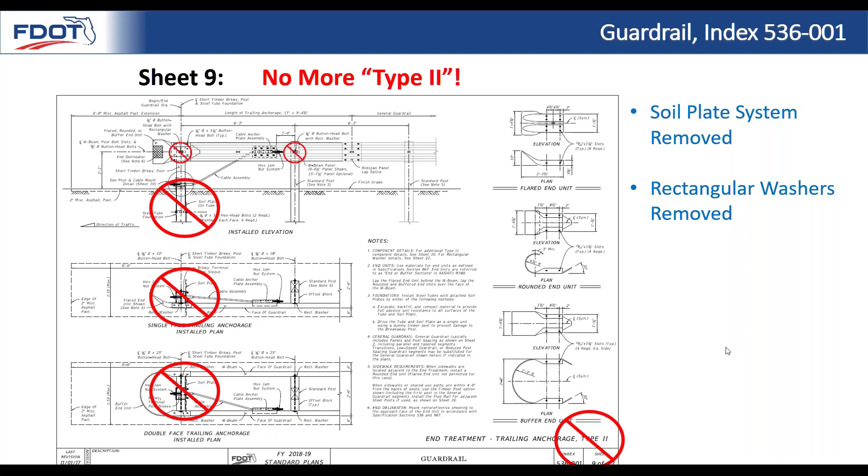Some rectangular washers have been removed. As far as additional things added, this is the new trailing anchorage - we have a new strut system, two struts total, one on each side, that takes the place of that soil plate.

We also have post 2, the new short timber breakaway post, and a steel tube foundation to help secure that a little better for MASH. These changes basically follow the latest design for MASH following discussions we had with Midwest Roadside Safety Facility.

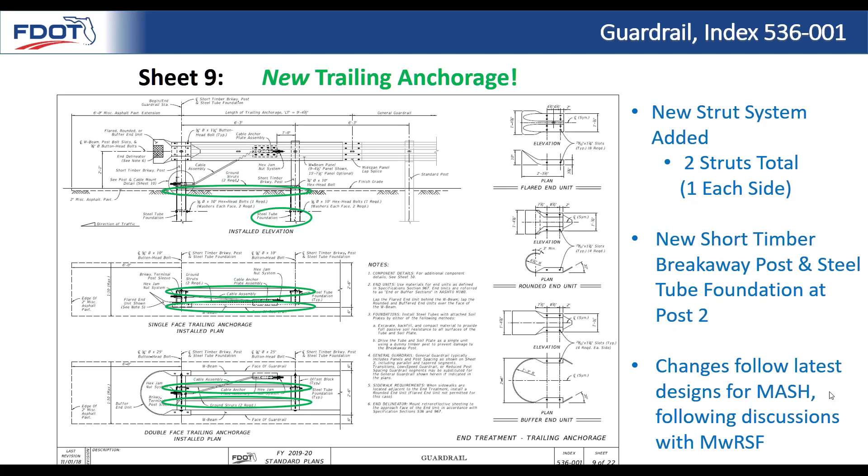So on sheet 10, to support that, we added the detail for the ground struts. We deepened the steel tube post foundations, again, based on our discussion with the research facility.

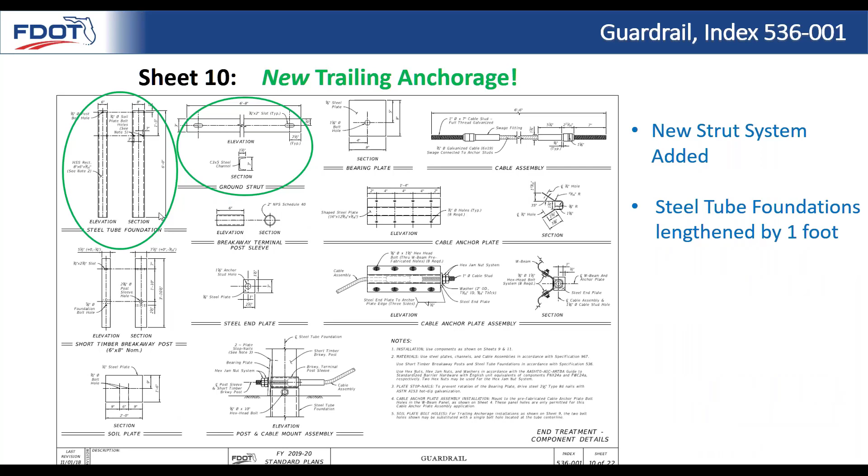To tip off the contractors that there is a change - because they've been building these things so long, they might not even look at the drawings anymore - we went ahead and changed the pay items to let them know something's different. So now all the type 2 items have been removed, as you can see, 25 and 28.

And then if you look at the BOE, we've added in the pay items basically 20 and 29. So there is a change there, and in the BOE it lets you know when it's effective. So that's helpful - pay item change on trailing anchorages.

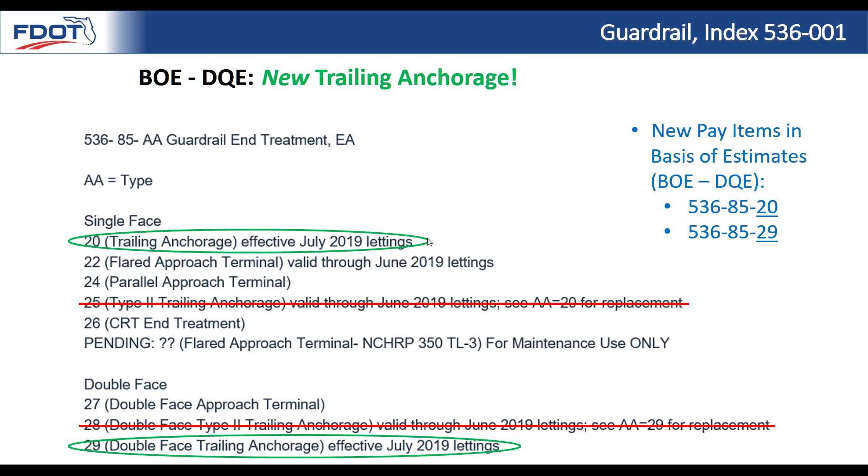One other concept from talking with the research facility, and looking at their reports, is that we have a new policy for basically placing the trailing anchorage. It used to extend basically one post spacing downstream of the hazard. Now it goes four post spacings.

They actually had done a lot of crash testing research and modeling on it, and it turns out that in order to develop this ribbon strength, you need to extend downstream of the hazard so that your vehicle gets captured upon impact going right to left here. I don't know if you guys can see the bottom of the screen - I heard that was an issue.

But basically, in order to ensure you capture the vehicle so it doesn't just penetrate through and go to the hazard, you need to extend that downstream.

This shows up in Part C of our new standard plans instructions. We explained the new policy there. And then also, if you use the new length of need Excel sheet,

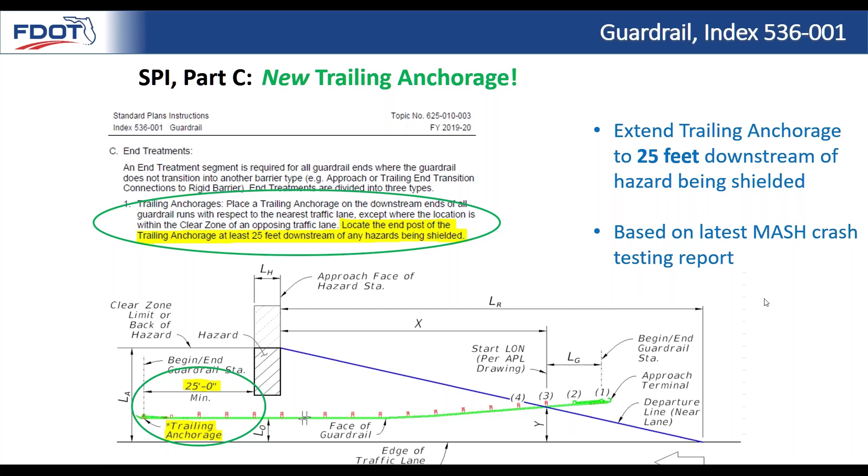it's going to show you that extension in the drawing automatically, so you know it's there. And if you actually use its stationing capabilities and input your hazard in the right location, it'll automatically extend that downstream for you. So it's handled in multiple places to let you know.

And that's all we have for guardrail. So now we'll move on to concrete barrier.

We've got a new barrier mounted sign support option that's got dual supports. We have space constraints, we have a new call out for variable section width, the pay item for that, and we'll show you how that works. Then we have a new wall shielding barrier and some taper rates for concrete barrier.

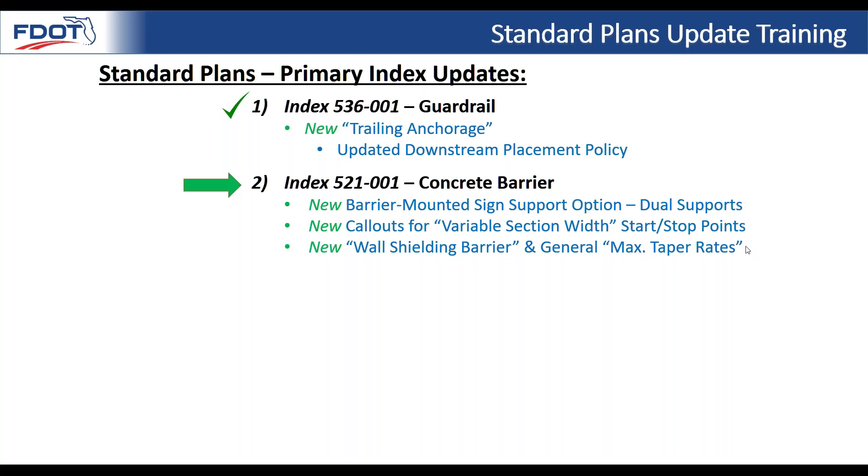So showing you sheet 8 now, this is a new sheet. We had a similar concept to this in years past, and we never really dropped the concept, but it wasn't drawn this way in the standard, and we had questions about it, so we went ahead and redrew it and added another sheet to show you what happens when you basically add dual supports on top of the barrier and don't increase the width of the barrier at the gutter line.

So the barrier basically stays 2 feet wide the whole way. You have no type of shoulder reduction. This would be used where you have limited space, and if the designer wants to handle it this way, this would be a project-specific design. So we went ahead and added that option in.

And I think in the future, the structures office may actually provide some support with helping to design the project-specific designs for these dual uprights. So you can stay tuned for that.

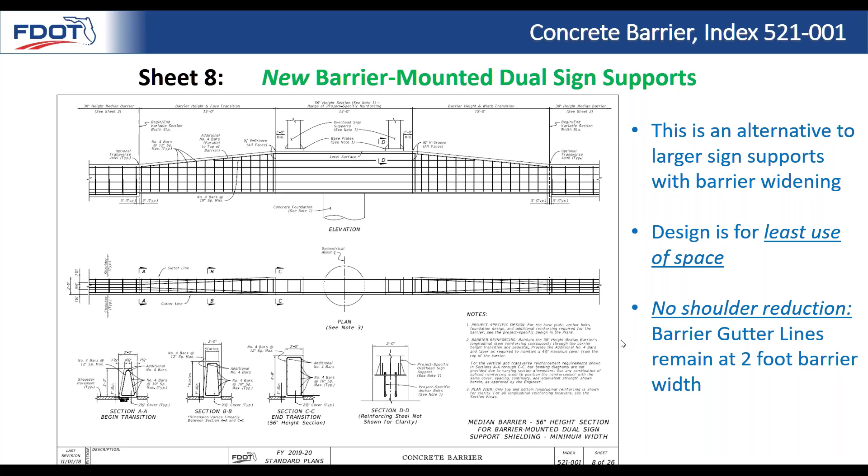So moving on, there's this concept called variable section width that we didn't have in prior years. We're now attempting to capture our costs more accurately. When you have a simple barrier section, like a 38-inch height symmetrical median barrier, that's very consistent, so you can capture linear foot costs very accurately for that. Short grade separated, tall grade separated, they're all pretty consistent.

But the thing that was throwing off costs and future estimates was that we have these more complex segments, we call them variable section width segments, that are all very project specific. So in order to not disturb these nice estimates, we went ahead and came up with a new pay item called variable section width. The BOE explains what they apply to. I'll show you some drawings on those because it's easier to see.

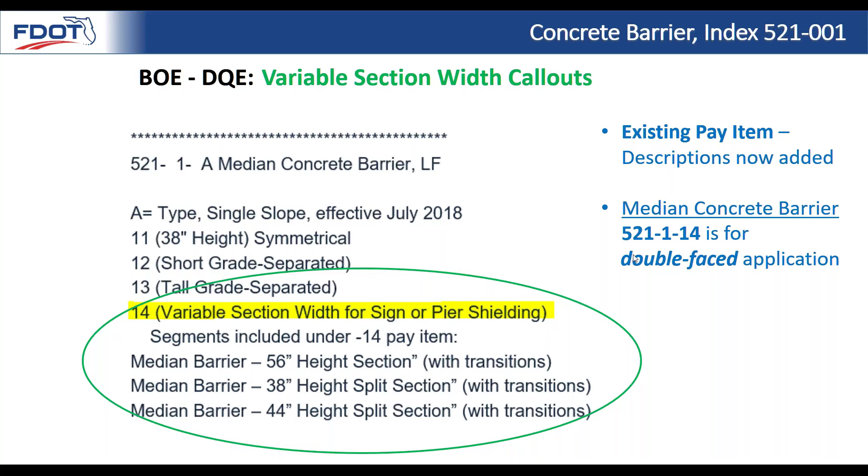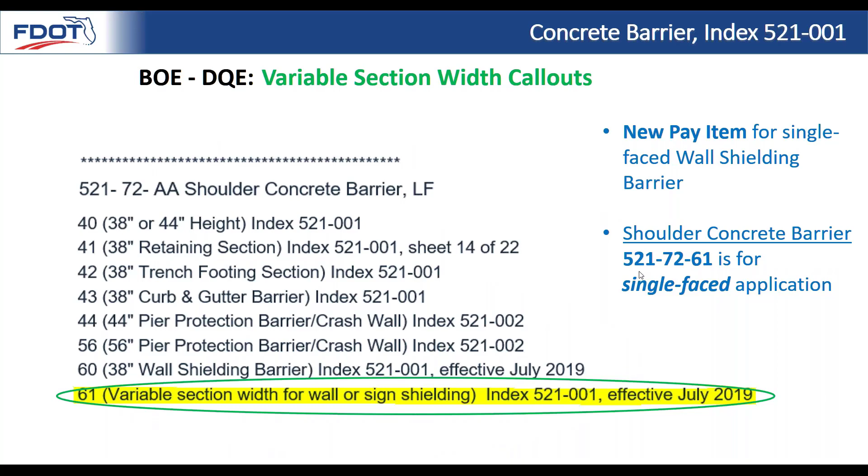For double face, you would use the median barrier version, and for single face, you use the shoulder concrete barrier version. So it's a variable section width, and again, the BOE tells you what it's used for. To make it more evident to designers where the limits of that pay item are, we went ahead and put in the standard plans drawings what the limits would be. I'll show you some examples of that.

Here would be our sign support, the larger sign support that's mounted atop the barrier. You can see the barrier gets much thicker, much taller. It wouldn't have the consistent linear foot cost of the 38-inch median barrier over here, so for that we use a different pay item. We put this in the standard plan drawing so you can see the begin variable section width station and the end of it.

Similarly, this is the new dual upright. The same concept applies because this section is much different than the standard section. This one isn't quite as easy to grasp because the gutter line stays the same 2 feet wide. However, we still call it variable section width because the top of the barrier does get wider and taller. It's basically non-standard, and in case there's any confusion, we called out in the drawings where the variable section width stationing is.

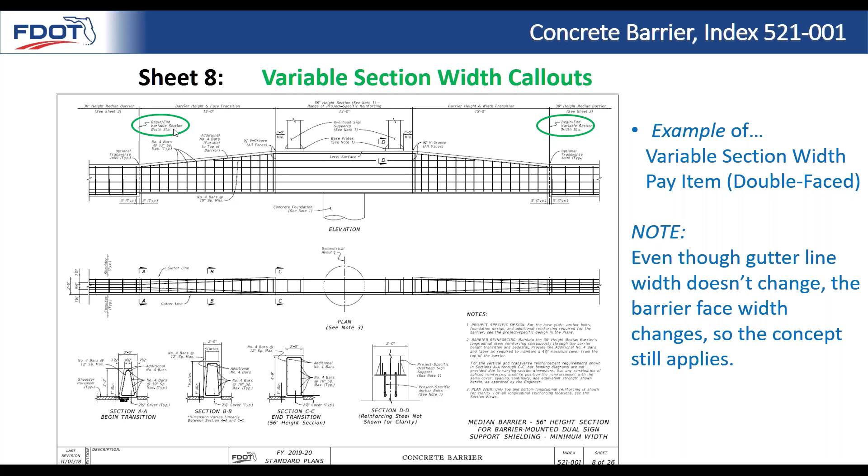Another example is the split barriers that go around the sign support pedestal. All of this together is just considered one linear foot pay item cost. I use this as an example to explain for simplicity, the linear foot measurement of this would just go along the center line. Even if there's dual sections, it's just one pay item and it runs along the center line. This is usually symmetrical and pretty linear, so it should be easy to handle that way. And again, we called out the start and stop points.

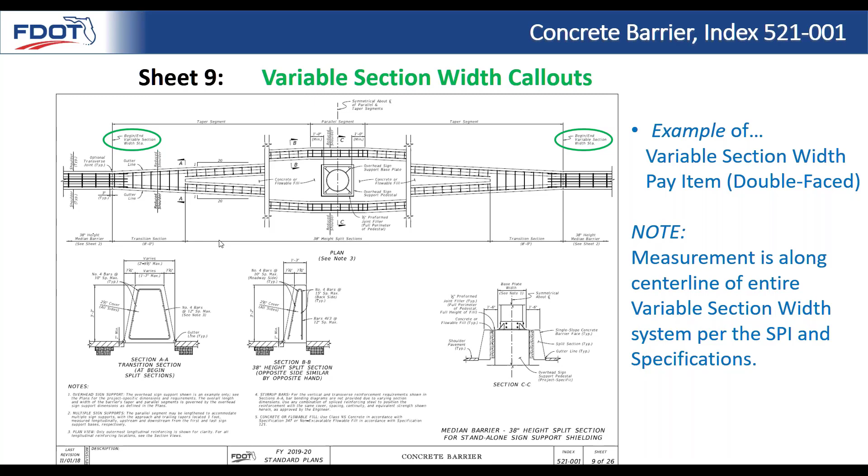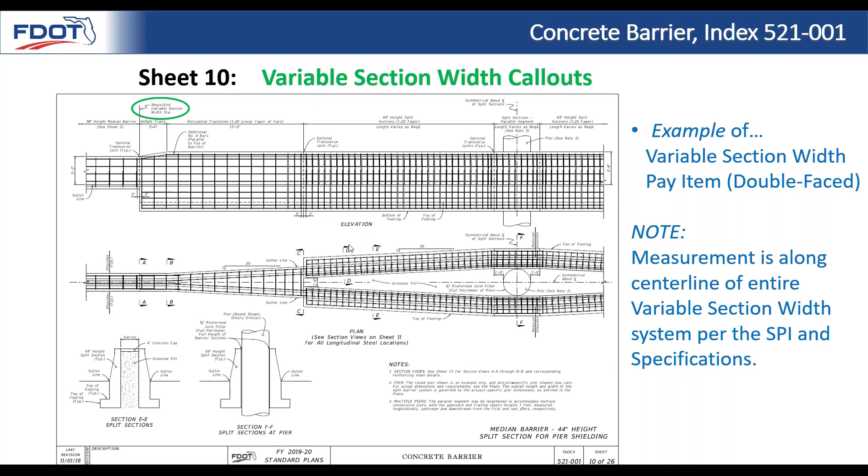One other example is for shielding a pier. Again, you can see this is all variable, not a standard shape. This is all highly project specific depending on the width of your pier. You can see where we would call out the different type of pay item here for variable section width.

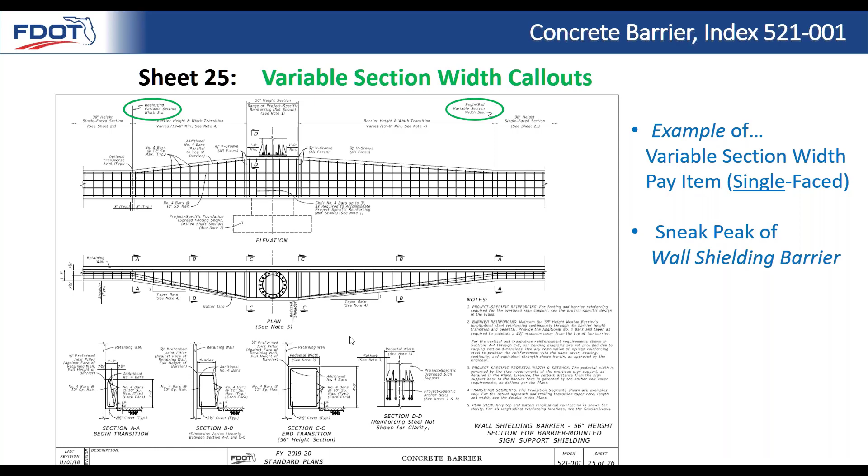And then last but not least, this is a new wall shielding barrier, so it's a little sneak preview. There you can see the retaining wall. This would be a standard section, but then you have the variable section width called out where this is all very project specific in order to handle that overhead sign support. This is an example of a single face version, the shoulder barrier pay item version of that. So now moving on, we've got the wall shielding barrier.

This is some new drawings and kind of a new concept that we've now standardized, but it's not really a new concept for the state of Florida. We're showing here past examples, and I want to point out these are non-standard because in the past we didn't have drawings showing this configuration of a flush mount, kind of a half section barrier. We didn't explain how to handle the joint behind it or anything like that, but designers were still electing this as project-specific designs. They were electing to do this, and it does make sense in certain locations. Why you might want to consider it is for just basic overall crashworthiness of the system.

Some of the MSE walls are vertical faces in general, but they may be less than ideal if their smoothness is not the best. The one at the bottom of the screen looks like it has a pretty roughened surface with a lot of ridges. You'd expect this would snag on a vehicle more so than some of the smoother walls, and certainly the barrier itself.

So to add some crashworthiness, it is beneficial. And another effect is to provide a little bit of protection for the MSE wall itself. The MSE walls tend to be a lot more costly than a simple barrier, so it's almost like putting in a sacrificial layer of concrete between the vehicles and the wall. That may help prevent some maintenance costs. If the MSE wall takes a hard hit, it may require a panel replacement, which could get costly and more complex rather than just replacing a simple barrier. So there's some added benefit of helping to shield the MSE wall, whether it really needs it structurally or not.

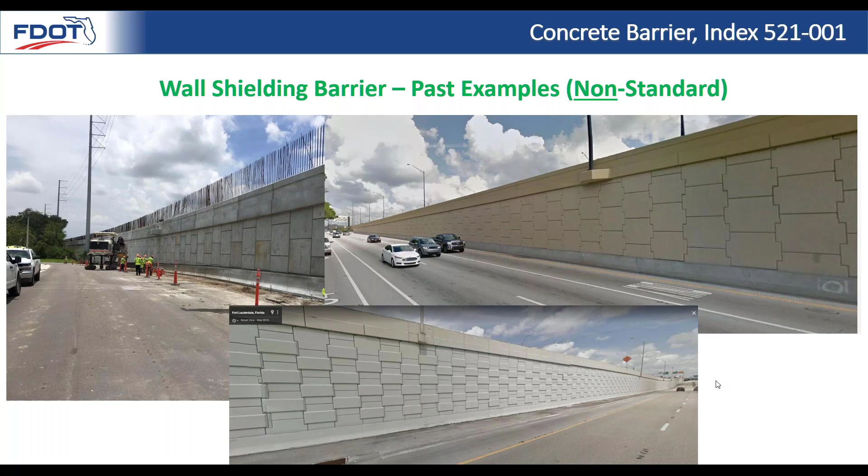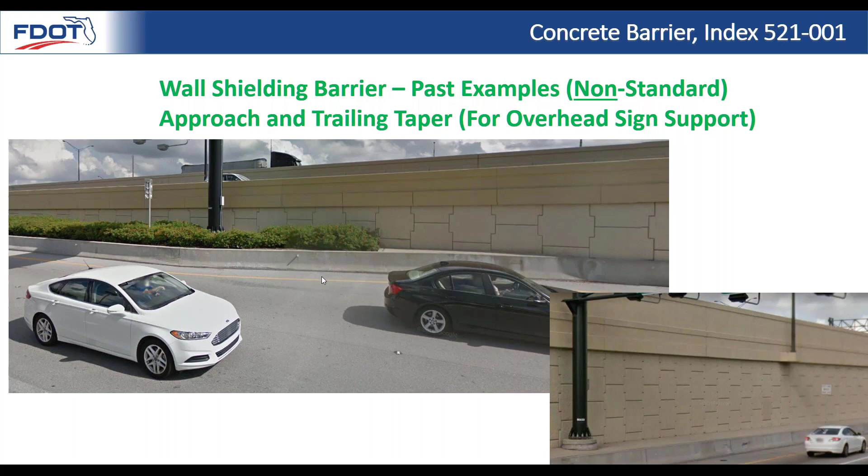Now again, looking at past examples, which we now provide some drawings for in terms of how to handle it, we have the tapering of the barrier, which tapers away from that MSE wall at different rates. In this case, it's for an overhead sign support to go around it. On the approach end, this is a gradual taper rate - Roadside Design Guide provides guidance on this, and now we will too moving forward. On the trailing end, in order to save space, this is a steeper taper rate, which makes sense because you're not quite as concerned with vehicles getting snagged on the trailing side. I'll show you some of those tapers coming up as well.

Here are the drawings again to support that - you can see we have the detail. Basically this overhead sign support would be a project-specific design depending on the size you need. We provide drawings showing the minimum dimensions all around it in relation to the barrier, in relation to the retaining wall, and then how to handle the backfill and all those other things. So we have drawings set up for that.

As I was talking about before, these are project-specific tapers, which I'll show you on upcoming slides, where on the approach side, with traffic moving right to left, it's more shallow, and then on the trailing side it's steeper. That also saves you significant cost with backfill of concrete or flowable fill by making these as steep as possible.

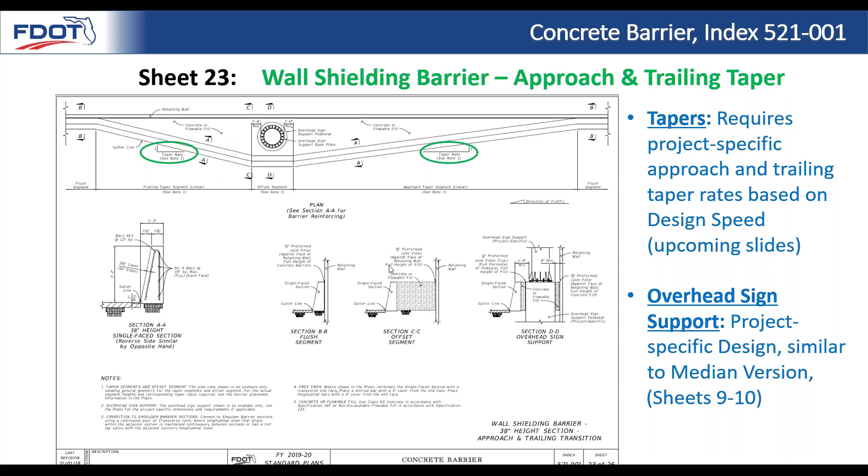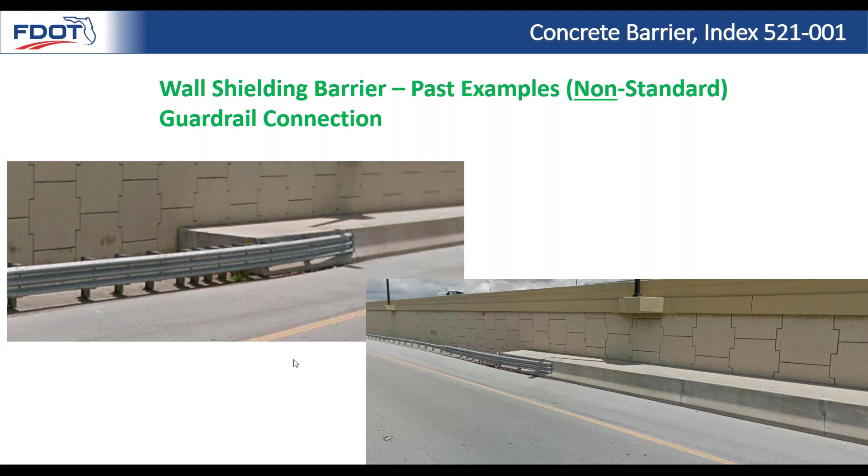So another item configuration we've seen out there is connecting the guardrail. You may be using guardrail as an effective approach treatment where you put an approach terminal here, or it could just be a convenient way to continue on with the barrier on the downstream end. So we went ahead and gave some details for that. You can see here we're connecting to guardrail, and this particular scheme requires a minimum of 5 foot, 3.5 inches, basically to attach the guardrail and allow enough setback distance for deflection and all of that. So we went ahead and detailed that out.

We explained how to terminate the backfill wall with some extra reinforcing for contractors and things like that. Again, this overhead sign support for connecting the guardrail may or may not even be here, but we're showing you an example of how it would fall into things with the dimensioning around it, should you have to use a project-specific sign support behind it.

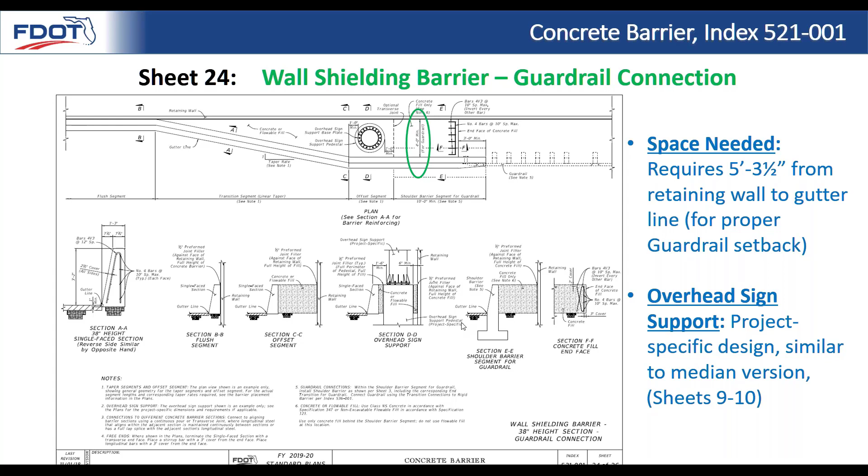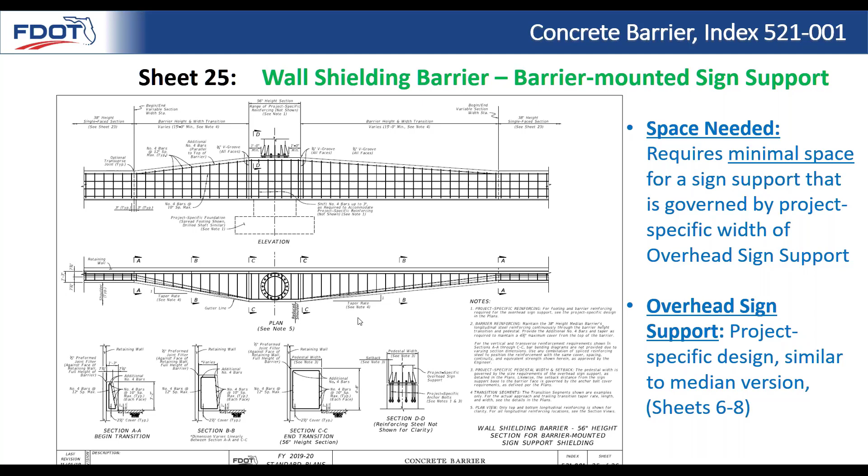Now another version of this, if you have very limited space and you're trying to mount an overhead sign support atop a barrier, this now has the sign support directly atop, so you're not placing it behind the barrier anymore. In this case, you're tapering out to the full width you need on the approach, which would be the project-specific taper, and then tapering back on the trailing end. The space needed for this is project-specific depending on the overall width required for that support.

And so now moving into these tapers, this is a new concept for barrier in general that we're introducing. It's been in the Roadside Design Guide for a while. We're basically using the same type of policy, but now we went ahead and included it in our Standard Plans Instructions because it's a good policy for certain circumstances.

So the median barrier is consistently 1 to 20. Nothing really has changed here. This is the way the Standard Plans drawings have always shown it. Typically, median barriers are limited access facilities where you have plenty of space. For simplicity, we keep everything symmetrical. And for the design, it works out nicely. You could have possible contraflow and things like that, so we're just keeping it simple.

But then where you tend to have limited space, and this is a newer policy, is the shoulder barriers. Typically, urban areas, you really want to maximize the space you're using. And for that case, we actually have taper rates that correspond to design speeds. And so the taper rate is basically the lateral offset per unit length, and the lateral offset is measured from, parallel to the roadway. So, for example, the 1 to 16, 55 miles per hour would be, for every 16 feet longitudinally, you go over 1 foot laterally. So that's how that works.

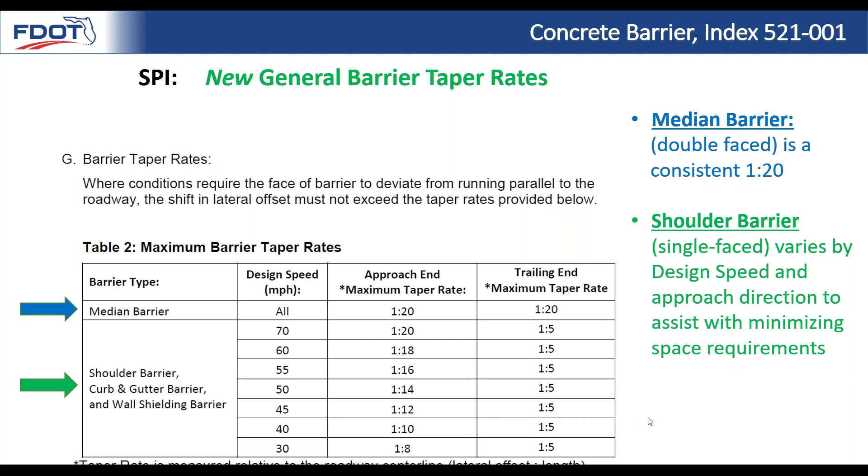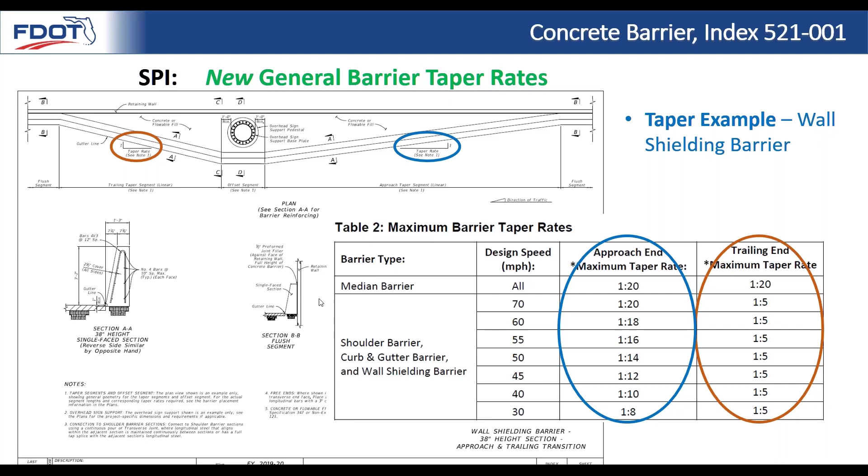And then on the trailing end, they're all simply 1 to 5. We're not quite as concerned with snagging on the trailing end, so that's more simple, and it saves you some space. And then here's the picture of how these relate. So that would be the approach end with the direction of traffic coming from right to left. And here are the values, and for this particular one, you'd be using the shoulder barrier values, so you can adjust it based on design speed. And that can be a project-specific design, saving some space. Trailing end would be downstream, assuming traffic's coming right to left, and that's typically 1 to 5.

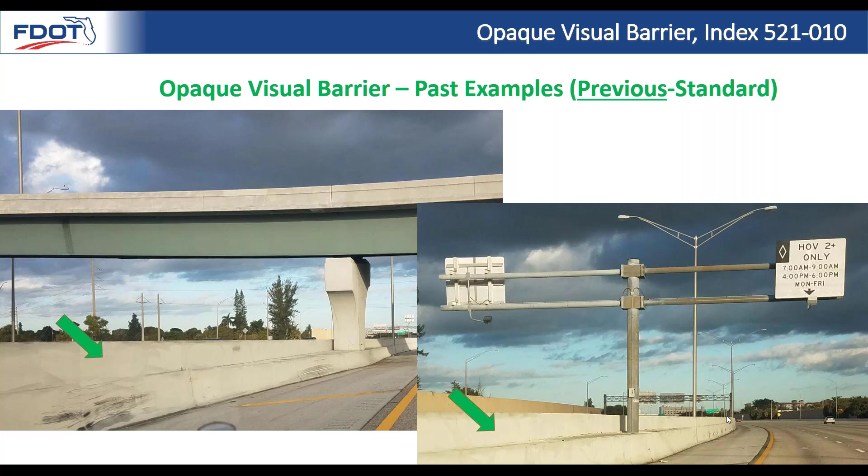Because where we've seen this being used in the past, despite no clear guidance for it, is in the heavily populated areas, like I said, South Florida, Jacksonville, Tampa, the really large highways. And the whole idea is if you have lots and lots of lanes of traffic and vehicles trying to change lanes and make maneuvers among lots of other vehicles, it helps if they're not looking at 6 rows of headlights coming at them. It's one less distraction, results in safer driving. And so in these really urban areas, they are pretty cost effective. And so we've added this to the FDM just to raise awareness that this option exists and provide a little bit of guidance. It remains a project-specific district-level decision.

Basically consider it for limited access facilities with glare issues, high traffic volumes, separation between opposing traffic lanes of 26 feet or less. So that's the 2 shoulder widths plus the 2 foot barrier. And then one limitation that we did add is that we don't want to see this being installed on overhangs, drop-offs like on bridge railings. So anytime there could be somebody in harm's way on the backside beneath it, like over a waterway, over a roadway, we simply don't want it to be installed because opaque visual barrier is a yielding design when it gets impacted, and it could fall. And so now we're basically saying that you have to have 4 feet of shoulder to either side of the opaque visual barrier. And so now that kind of limits it, so now there's no drop off.

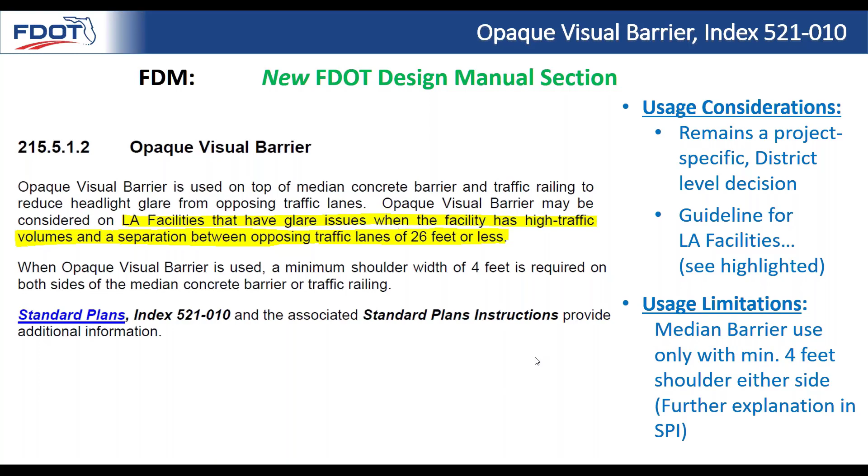In addition to that, with the yielding design, when it's impacted, there could possibly be some debris, and the 4 feet just gives some room for the larger piece of material to fall to the shoulder without impacting traffic. Kind of the energy can dissipate a little bit. So it's just a little bit of a buffer that helps with safety.

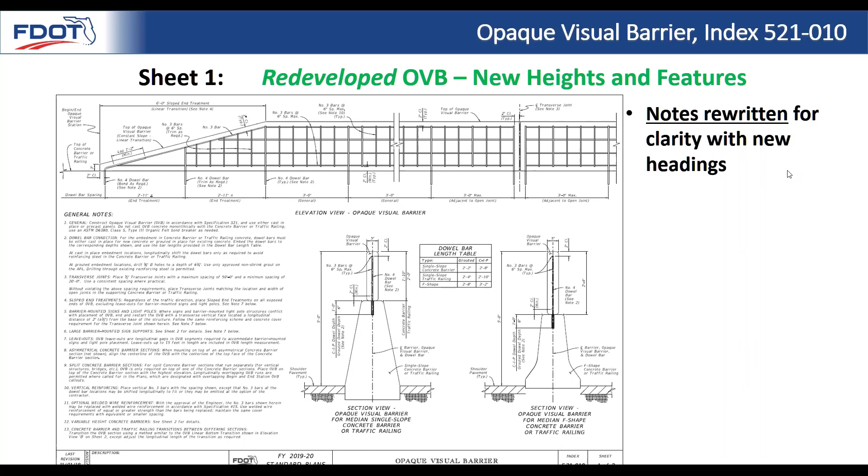And so here are our new drawings. So the notes were rewritten for clarity. We've added note headings to help people quickly find the information they're looking for. And now we're handling the new single slope barrier shape. We show specific drawings for that. Because the new single slope barrier is a little bit taller, the overall panel has actually gotten a little bit shorter, which is good for durability. And the overall height is 60 inches.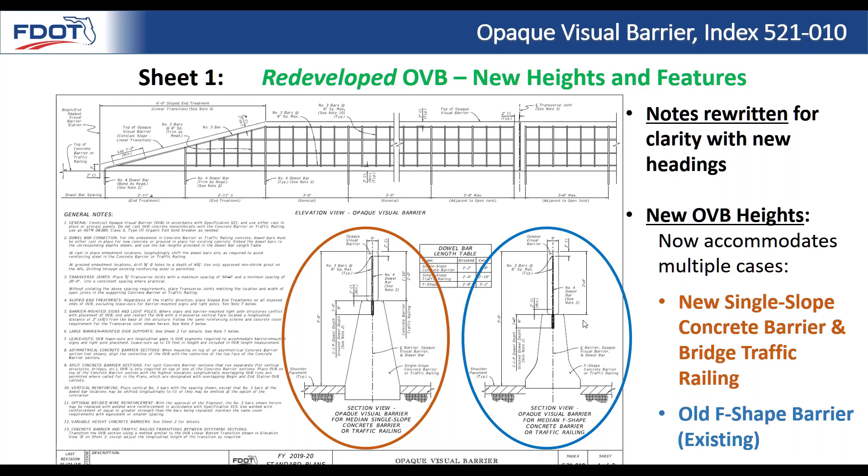And that's also true for the old F shape. And so we still support the old F shape. There's a lot of that existing in the field. If you're doing a new project and you have old barrier in place and you want to add some glare screen to it, you can go ahead and install it to the F shape, and we have details that cover that. One other improvement we made is the web is now 6-inch spacing. In the past, it was almost 2 feet. So the whole idea is to lessen the size of any impact debris should there be a severe impact.

And then the other design improvement is joint spacing. Basically, we're requiring that the panels are at least 20 feet long. There's only one installation issue we've ever really seen in the past in one particular district where there was a maintenance issue because if these things got bumped by vehicles, they might start leaning. And I think it was discovered that the cause was that these panels were very short. And so when a dowel spacing is 3 feet, you'd only engage 1 or 2 dowels per panel.

And so to fix that, we now have a minimum panel length that engages plenty of dowels and also adds some weight to it. And so any of the districts that had longer panels, there was never really an issue. So they had been performing nicely in the past when designed that way.

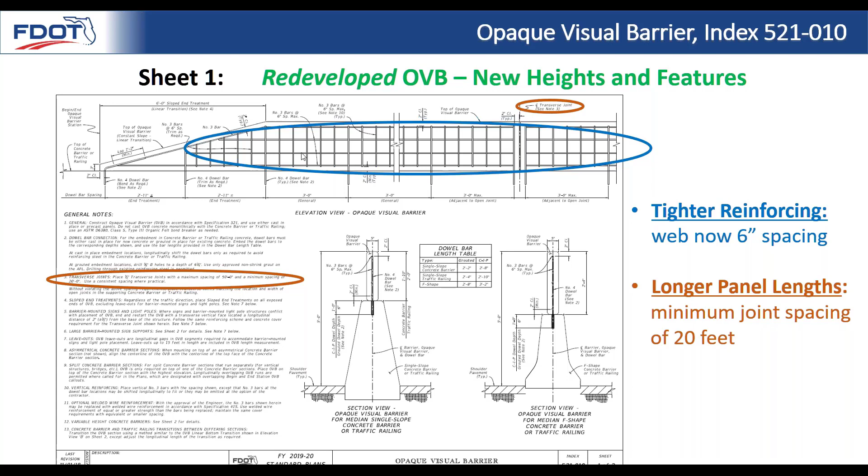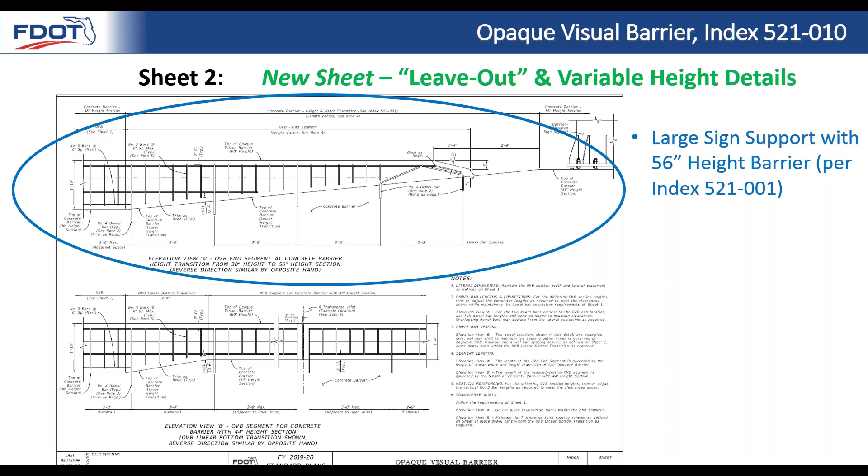So now sheet 2, we've handled some different configurations, maintaining the 60-inch opaque visual barrier height. We show a case where we have the barrier that's raising up for a large overhead sign support to 56 inches, and we basically show the termination of the opaque visual barrier panels. And so that's handled now, and the roadway designer doesn't really have to think about that due to the next concept. So we have a concept now, which is explained in the notes on sheet 1, and then the SPI, and even the specifications, called a leave out.

So when you're putting in opaque visual barrier, you can just detail it as one continuous line, even if it's a mile long. If you have any interruptions, pretty much for overhead sign supports or light supports that are barrier mounted, or brief pauses in the barrier, you don't have to stop and start your length measurement. A leave out up to 15 feet is permitted with one continuous pay and measurement, and so that kind of helps out the designers keep things simple. And so this would be a large example of a leave out. We have a large overhead sign support, but you could have a lot smaller ones as well.

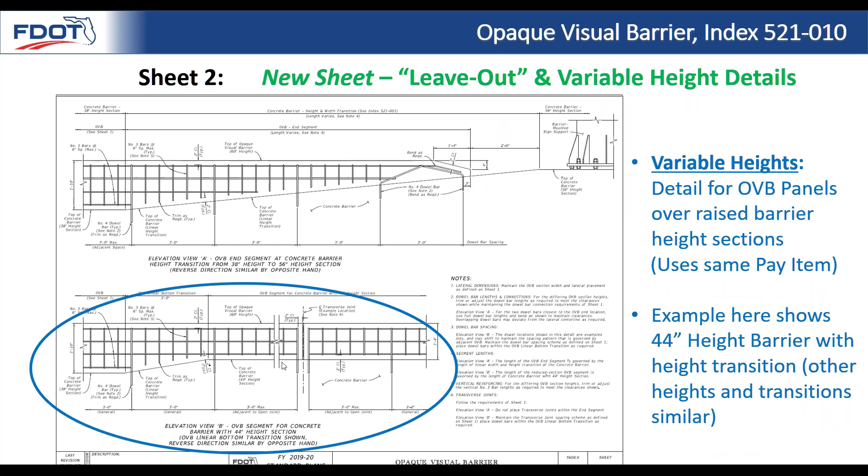And then one other thing we cover is when you have variable barrier heights, we just handle this for the contractor so the roadway designer doesn't have to think about it as much. If the barrier is raising up taller to shield a pier or something like that, the opaque visual barrier just continues right over it with the same height, and we show the details of how the panel itself gets shorter.

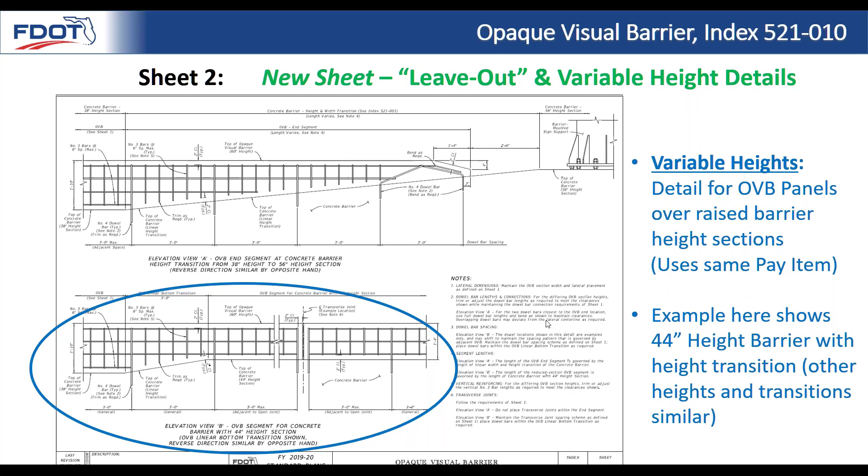And we also have SPI that's been redeveloped, so it covers crashworthiness design limitations. One thing I just wanted to read out for you guys are these design limitations for crashworthiness, so roadway designers don't get the wrong idea about it. But basically, we say opaque visual barrier is only intended for use as a visual screen. It's designed to withstand wind loading, light debris, minor contact from errant vehicles. It's not intended to resist or shield against errant vehicle impact loads.

So it's basically designed to yield if it gets hit by a serious vehicle strike, and then let the concrete barrier itself do its job. And so don't really install opaque visual barrier thinking you're going to be shielding a pier with it, because that's not how it works. It's designed to yield. It's just designed for a visual screen.

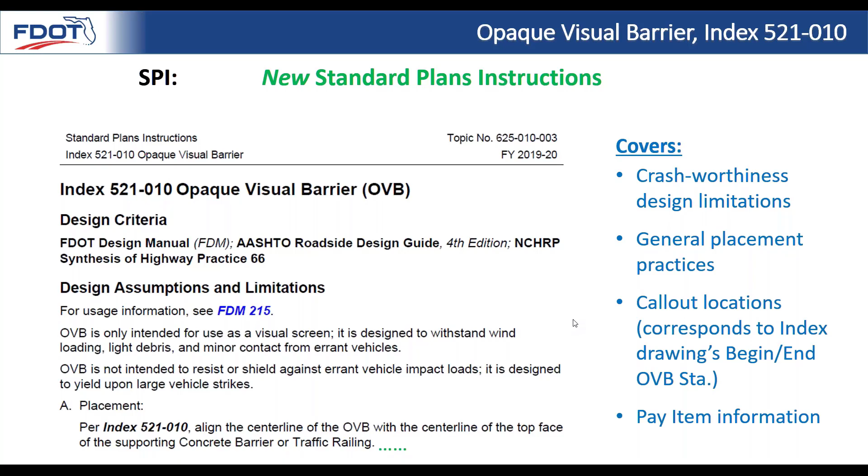So we also explain some general placement practices for split sections, which side to put it on, call out locations, and then some pay item information for opaque visual barrier. And then with that, we're finished with the OVB. So moving on to our crash cushion details. This is our last index I'm going to talk about.

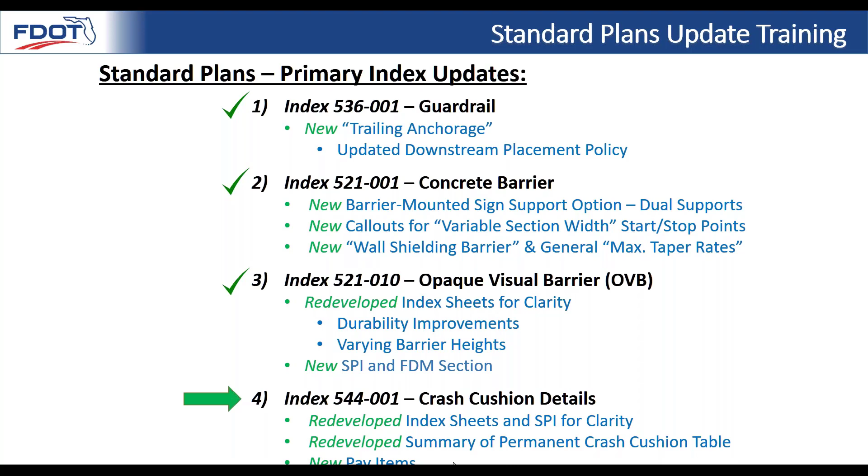So we've redeveloped some index sheets and the SPI for clarity on the crash cushion, and we've redeveloped a summary of permanent crash cushion table. All these things hopefully increase understanding, make things a little more simple to use, and then we have a few new pay items for that, so I'll just walk you through those.

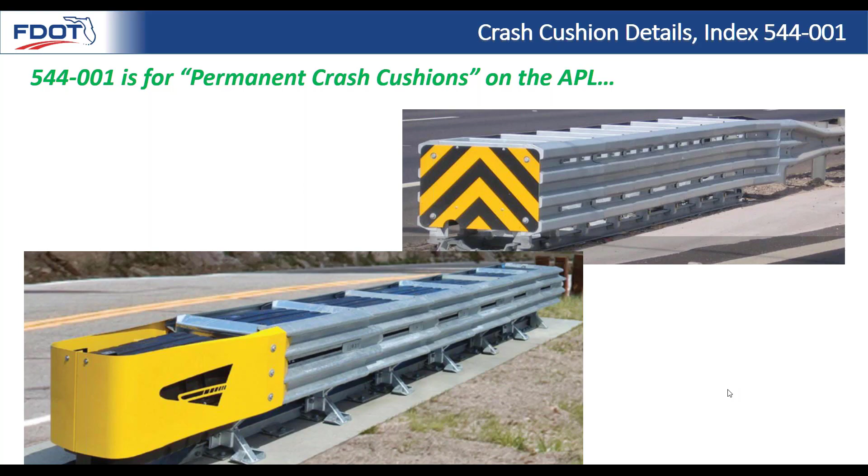And so one thing to mention is Index 544001, crash cushion details, is designed for permanent crash cushions. Temporary crash cushions is a different topic. The SPI for this even tells you where to look for temporary crash cushions. And so drawings and notes redeveloped. Length of need process has been simplified, which I'll explain. We've also simplified the table and the pay items.

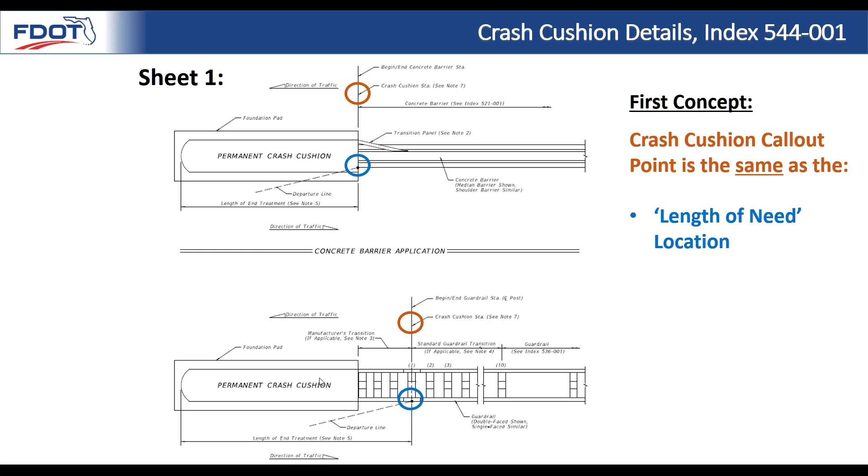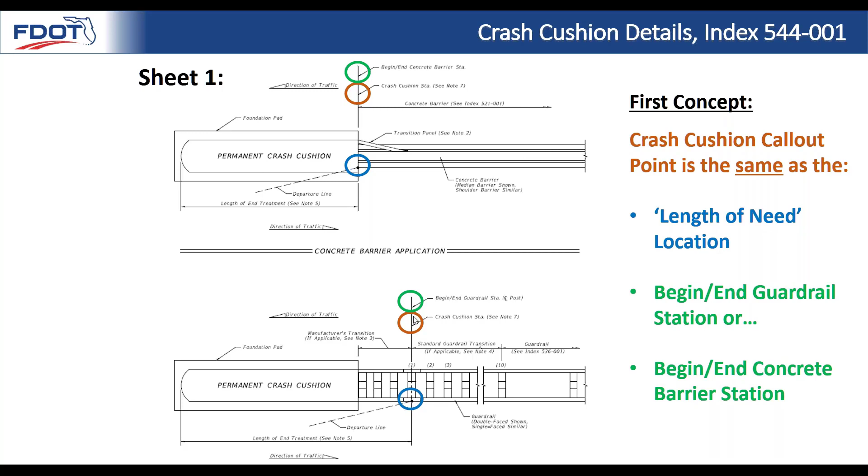And so we got basically three concepts. First concept to talk about, it's kind of new, is the crash cushion call out point right here. Basically this would be like your old station location. How you identify where your crash cushion is is now the same as the length of need location. And so it creates a more simple process where the crash cushion just kind of extends downstream of the traffic. So it's the same as the length of need location. It's also the same as the begin-end guardrail station or the begin-end concrete station. So all these things now align for simplicity.

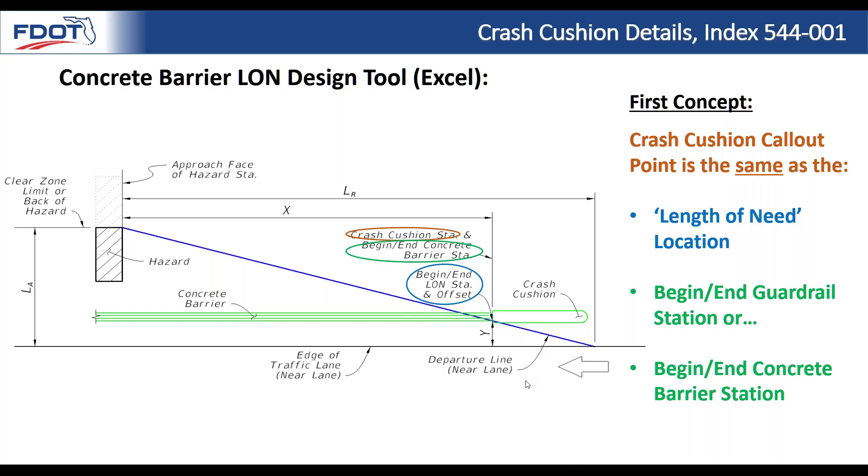And then now looking at the length of need design tool, this would be the drawing in the Excel sheet. I'll just reiterate the same concept. So you got your traffic coming right to left, your departure line, and that's kind of your length of need point. So your crash cushion station is right at the length of need point. It's right at the begin-end of the concrete barrier, the guardrail, whatever you're connecting to. So that measurement is the same. They don't overlap for simplicity. And then also, as I was saying, your connecting barrier. It's all the same point, all aligned.

And then, so the second concept is now kind of what happens upstream on the approach side of the point we were just talking about. And so that's called the length of end treatment. And so that's a simplified process we came up with. It's similar to the guardrail approach terminal concept. And it basically includes all proprietary elements required per the APL drawings. And that can even include a manufacturer's transition.

If you look at the APL drawings, they could require additional guardrail, and they'll show where you're going to connect to the standard guardrail in the APL drawings. That's mostly for the contractor to be concerned with, but regardless of what's required on the APL drawing, the designer can just assume this length of end treatment includes everything. And so what the designer needs to know is the default length for this, in order to accommodate the contractor's choice of all different crash cushion types, is 27 feet, 6 inches. So if you use that length, it will then accommodate the contractor to use anything that's on the current APL.

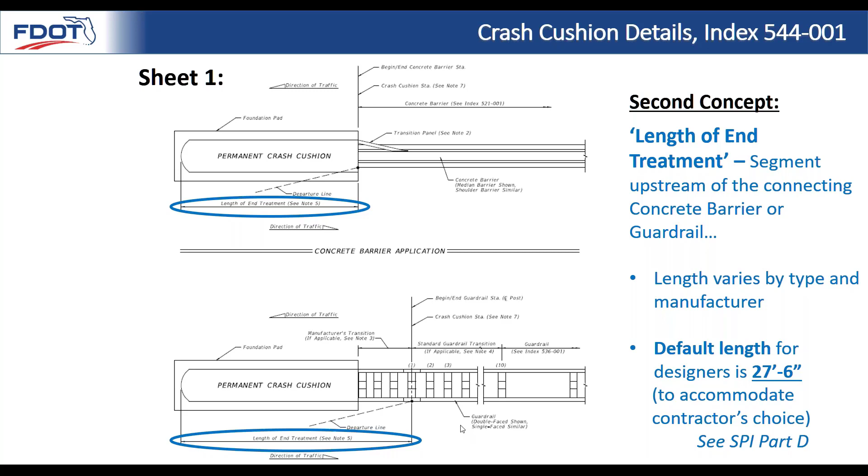Okay, so the third concept, getting a little bit more detailed. This is the last one. Basically now we're on sheet 2 of that index. So here's all the similar things we just showed you, length of end treatment. Here we have this parallel segment, which you have to know is basically, from a design perspective, always parallel to the road, and it's always 21 feet, 10.5 inches long. So we got 21 feet, 10.5 inches. And that's always going to be required.

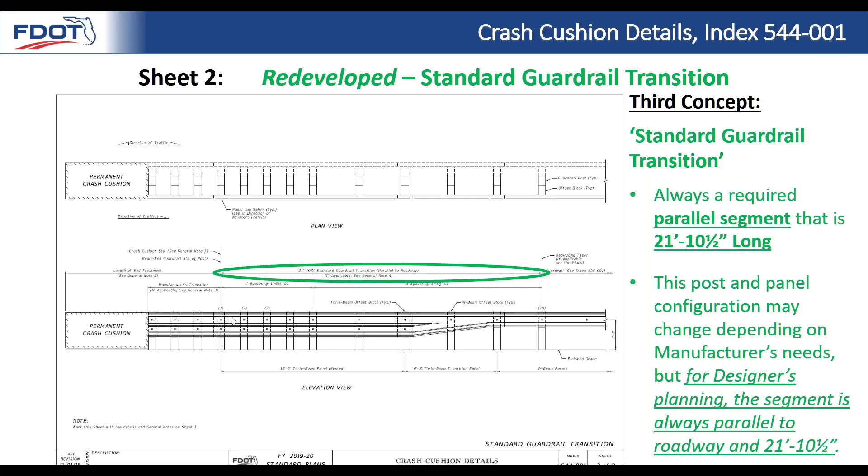The contractor may switch up the configuration. We have notes in the standard plans to explain to them when they need to use this configuration, when they don't. From a design perspective, you always need to have that link there that's parallel to the roadway. And one place that could come into play is where you have connection to dual bridges. You're trying to minimize the length of your guardrail with the crossover configuration. And so you got this parallel link. And that parallel link right there happens to be exactly 21 feet, 10.5 inches.

That's the default in the Excel sheet. So that's a nice benefit of using the Excel sheet. It's just ready to go, and the note explains where it came from. And so you can see how all these concepts align.

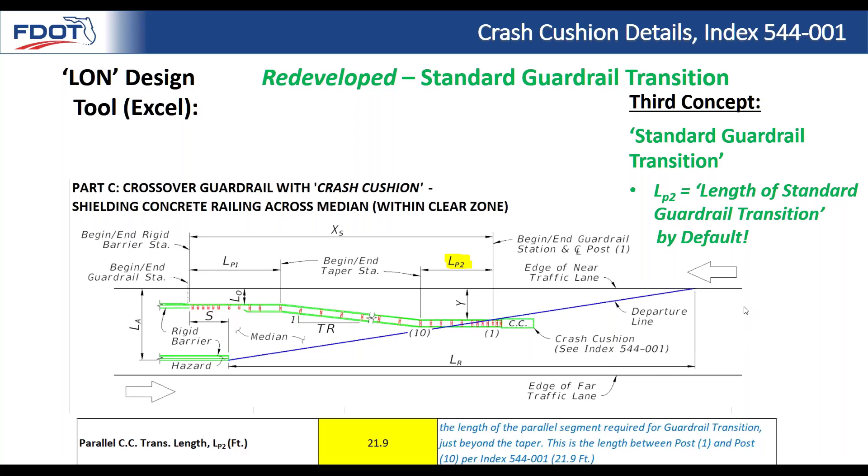So that's a parallel segment, 21 feet, 10.5 inches, 21.9 feet. So to read it one more time, we got the reminders of this whole layout. We have our 21-foot 10.5 that's required. Then you have your begin end guardrail station, crash cushion station, length of need point at the end of that.

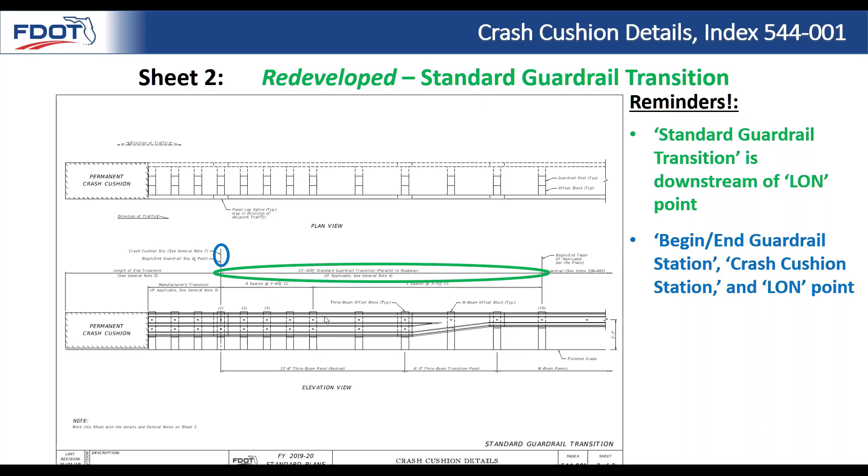One other thing I'm going to point out is that this is the begin end guardrail station measurement. Everything to the right side of it is just considered standard guardrail as a pay item. All this is included, and the specification will explain that. And then the last thing is the length of end treatment is this portion here.

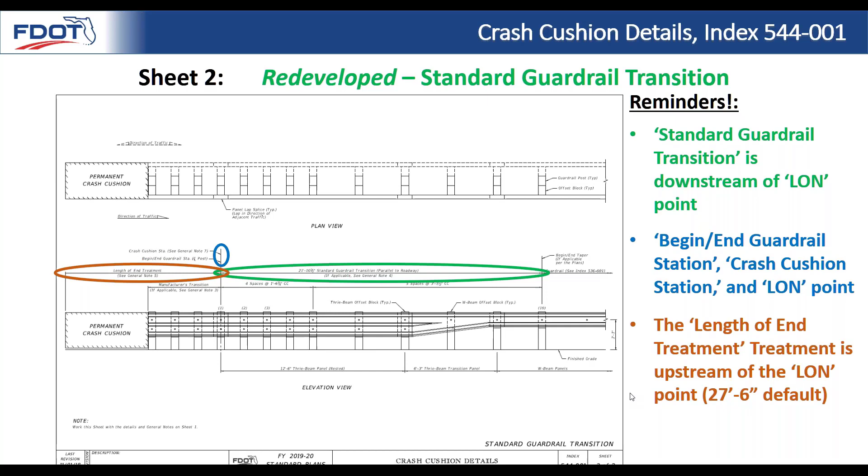So you got all the different portions, everything now aligned nicely. So this is a good resource to look at when doing your design.

Now we have the SPI, we've redeveloped it. These topics are now explained, in my opinion, pretty clearly. So this would be the first place to look if you're new to crash cushion design, and it should handle all your situations.

It explains the location call out, which we've just gone through, the length of need process, which basically directs you to, if you're using guardrail, see the guardrail length of need tool. If you're using concrete barrier, see the concrete barrier length of need tool.

Test level selection based on design speed, system width, length of end treatment — the default value, as we said, is 27 foot 6 inches. And now constrained conditions, if you don't have that space. We won't get too deep into today, but we have some clear explanations in the SPI of how to handle it if you don't have all that space needed for a crash cushion.

There's multiple ways to reduce that space. And then you put it in the table for the contractor to see that they have a length restriction.

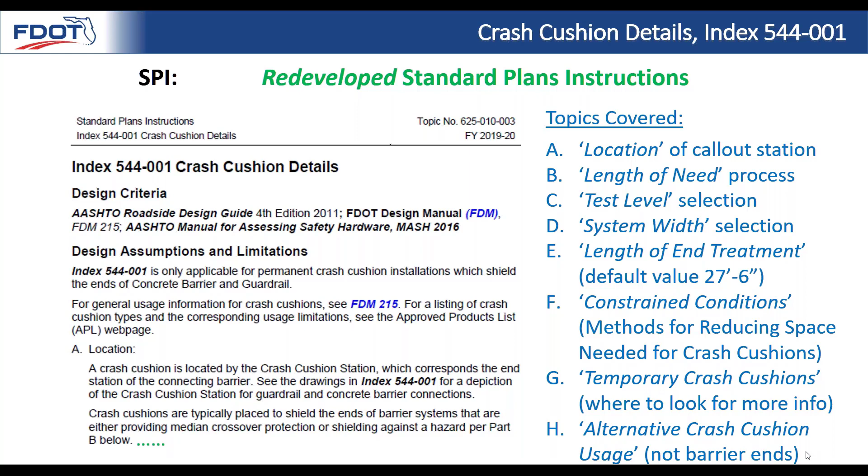Temporary crash cushions, just where to look for more information. And then we have a little portion for alternative crash cushion uses. If you're not connecting to barrier ends, you're just trying to shield it from hazard, we explain how to handle that.

So here are our new pay items. We used to just have one simple pay item. It wasn't really covering the needs or communicating as clearly as we wanted to the contractor. So now we went ahead and improved that. That old 75 is gone.

And now we basically got two pay items: 544-2 for TL2, that aligns nicely for 45 miles per hour and less; 544-3 for TL3, that's over 45 miles per hour. And then the one other choice you have to make is whether or not it's a narrow or wide system.

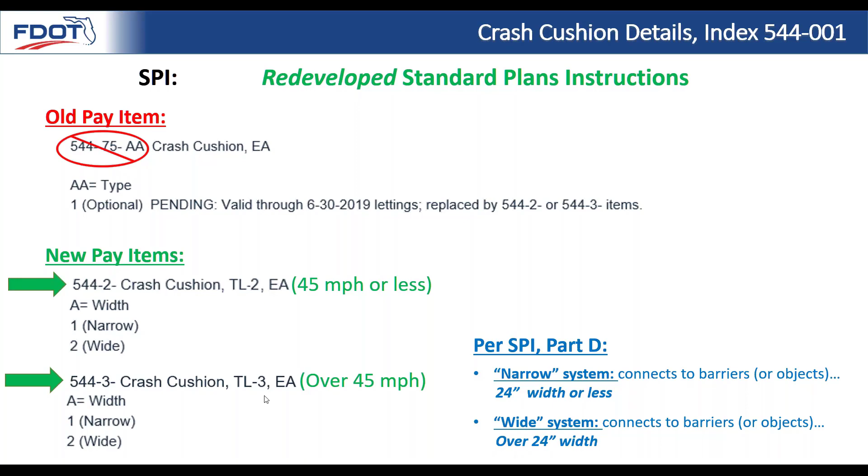In the SPI Part D, it explains for connecting the barriers, 24 inches or less, you're basically using narrow. That's standard — narrow. The concrete barrier is 2 feet wide, guardrail is less. So that's narrow. And then wide would be something kind of extra large, basically. So then you go ahead and pick the -2. So that's the new pay item concept.

And last but not least, we have a kind of a simplified table from what used to be there. So I'll just step you through briefly the things on the table. Location is defined in SPI Part A, as we had mentioned, and right here.

System width is defined in SPI Part D. It's basically what happens with this now — I guess Candy was clever over there, and the CAD group realized that once you select your pay item, you're kind of by default selecting the test level and whether it's narrow or wide.

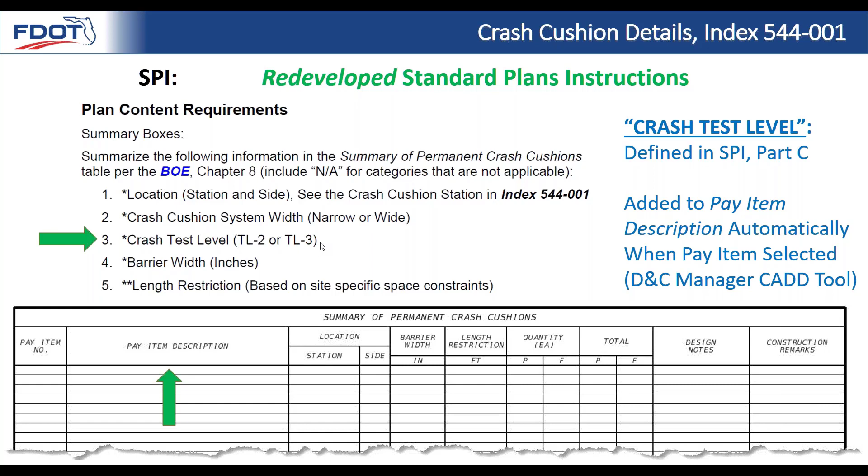And so once you do that, that's already taken care of — it will show up automatically in the pay item description. So if you use your D&C Manager, crash cushion width and test level is going to show up in the pay item description, so you don't have to input that. Same thing, crash test level is going to automatically show up for you.

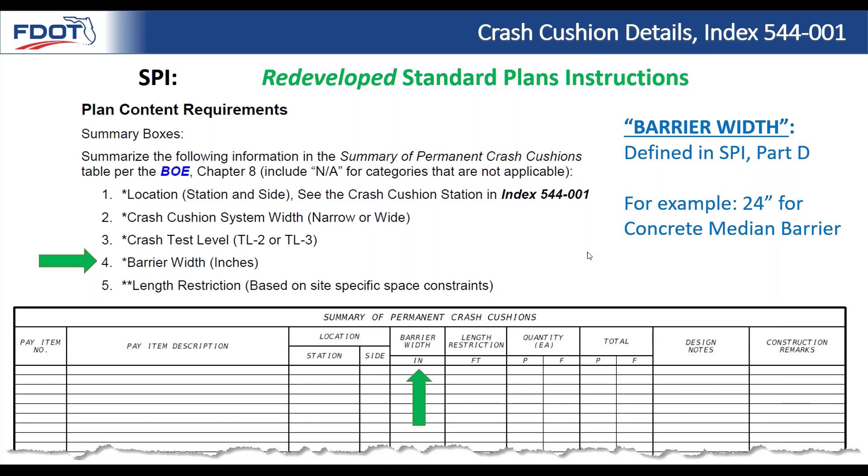And then barrier width is defined in SPI Part D. If you're connecting, for example, concrete median barrier, you go ahead and call that out, gutter line to gutter line, 24-inch barrier width. So that's where that goes.

And then last but not least, length restriction. Like I said, we have some good explanation of what happens when your default crash cushion length of 27 foot 6 inches just simply doesn't fit for project constraints. We have a couple of different methods where you can bring that number down.

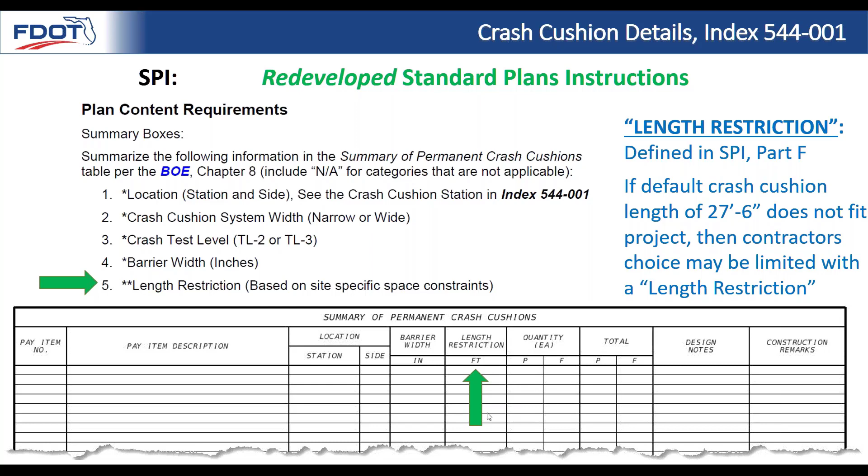And then what happens is you're going to want to choose a number that allows the contractor to pick at least a couple crash cushions off the APL, but they may be shorter than 27 foot 6 inches. You input that value as a length restriction, and that takes care of it for you. And so with that, I think Durwood's handling questions real time on there.